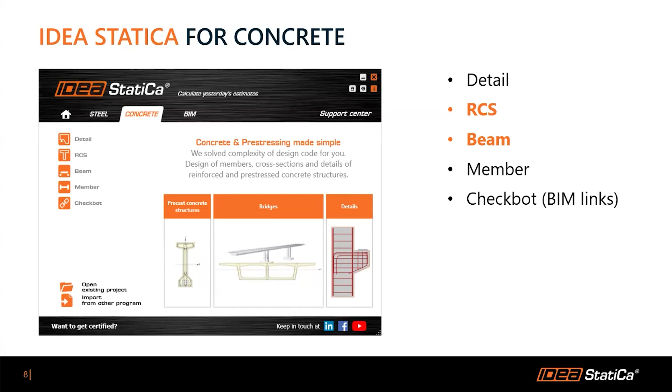So, as I've just said, we are going to work with beam application. But the question, of course, is what is it for? It is for straight or polygonal beams mainly. It was developed for 2D FEA structural analysis, but what is important, you can model single or multi-span beams, including time-dependent analysis. It means you can define construction stages like prestressing stage, transport, storage, start of working life, end of working life.

You've had these courses, so you know there are some issues with creep, for example. It is different at the start of the working life, it's different at the end of the working life. There are some issues with shrinkage, etc. So this application is for it.

Once we have this time-dependent analysis, it means it would be handy to have prestressing in it, and it is there. You can model pretension wires or strands, and also post-tension tendons. I know that you have done only pretension beams, am I right? Yes. And there can be also the combination.

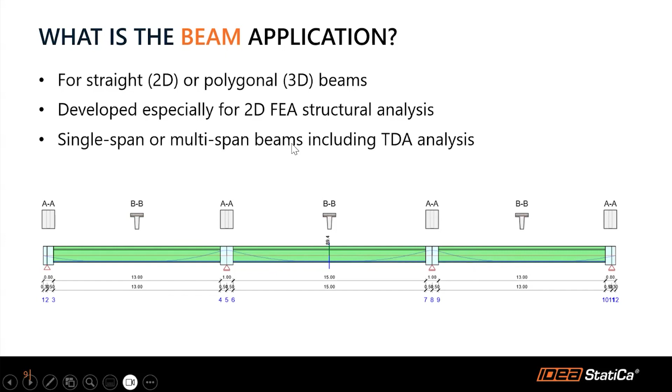So these are the capabilities, some assumptions, just to better understand what this software is about. We are dealing with 1D finite element model. I know it can be hard for you to understand it - you can imagine that we define only the straight lines with nodes, nothing 2D, no plates, no decks and stuff like that. The analysis is linear, meaning it's basically easier to calculate, but we have nonlinear deflections.

It means that it is influenced by cracks, by shrinkage and by creep, because these long-term deflections are usually higher than the short-term deflections. And what we can also calculate in this application is redistribution and reduction of internal forces on hyperstatic beams - if you have more than 2 supports, like more than a simple beam, you can calculate these kinds of redistributions according to the Eurocode.

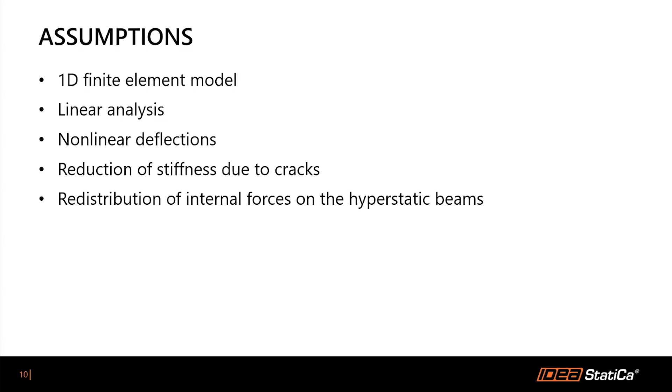The RCS application, the second one we are going to touch today, is incorporated in Beam, so you can send the data from Beam to RCS and vice versa. It is mainly for 1D section check of reinforced, composite, and pre-stressed cross sections. We have also a module for 2D checks, for decks, about the Baumann method. Maybe you will hear about it - you can just remember that there is something that can help with this Baumann method.

What is important to know is that both of these applications are strongly code-based, so you can calculate only according to Eurocode. In Romania, Eurocode is valid and necessary, so it will work for you. We can deal with ultimate limit state and serviceability limit state, meaning I'll show you how to calculate crack width, stress limitation checks, and things like that.

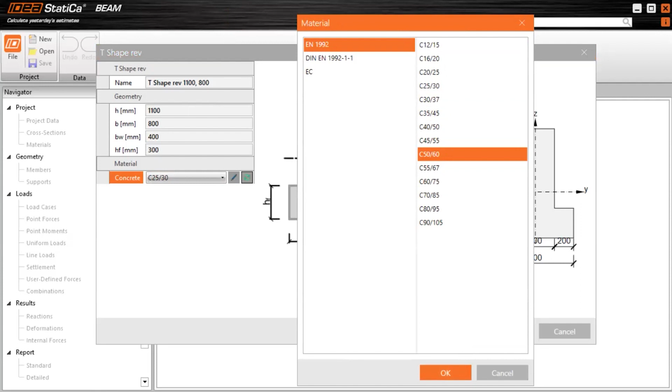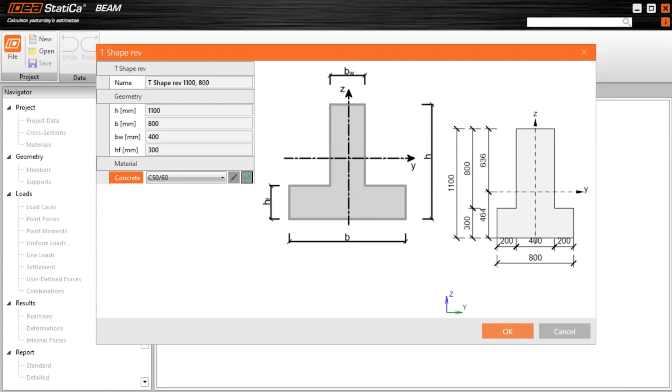So, we have the cross section, click on OK.

The last thing, we need to set permanent load and variable load. Let's input pretty high values to see some great results - permanent will be -85 and variable will be -45. Then I'm going to uncheck critical load patterns, let's leave it and we will have the summary combinations, yes. So it should look like that, and once you have it, you can click on next.

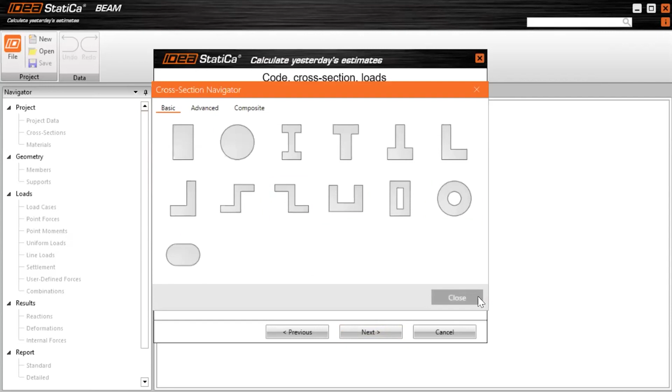Can you show the cross section, please? Of course - oh sorry, no, in that way, I have it here. Give me a second. So, here is the cross section again.

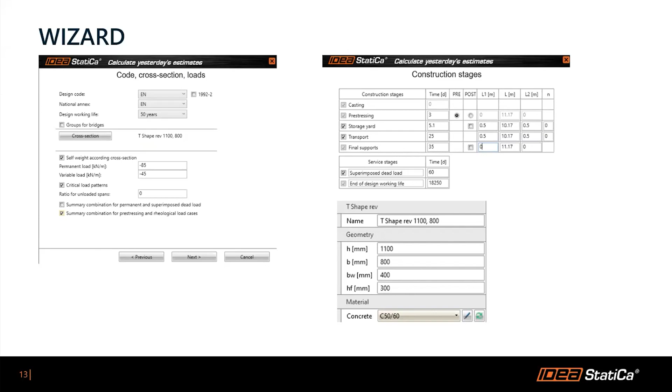So during this presentation, there will be some modeling parts like that. Then we will stop for a while and I will be talking about the inputs, what it means, etc. So don't be afraid, it will not be for the whole presentation like that.

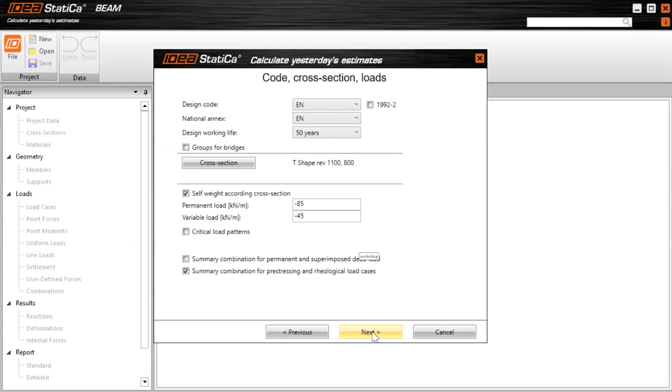Click on next, and we just need to set some construction stages. Please rewrite this cell to 0.5 and this cell to 0. It will define the supports during the construction process. You will see it graphically immediately in the software, and I will show you what these numbers mean.

It doesn't actually matter what you have here in times or other things, but it would be nice to have these numbers the same as I have, because we are going to change these times and work with them a little bit later on.

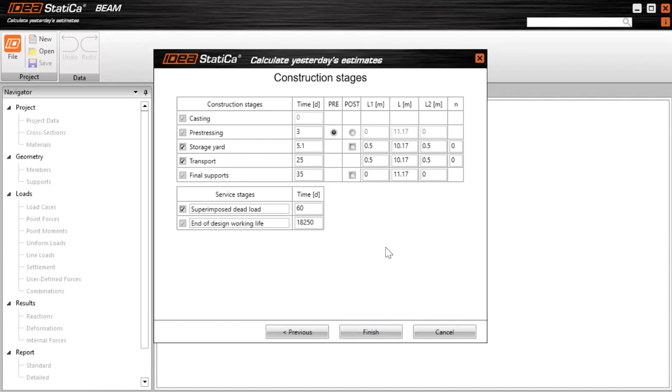So this is the model, this is the model in 3D, and now I will introduce the interface of the application just to know the nomenclature. So this is the top ribbon, here. This is the navigator - so when I said in the navigator, it means this left part. This is the main screen, the scene where the graphical input or output is.

Below that, there is a data window for inputs and additional information. So in case you make a mistake at the beginning in the wizard, you can go to the project data and change it. Project data is the first item in the navigator. We can go through it, what we have here, and you can see that everything can be changed after the wizard. The wizard is there mainly for the quick creation of the model.

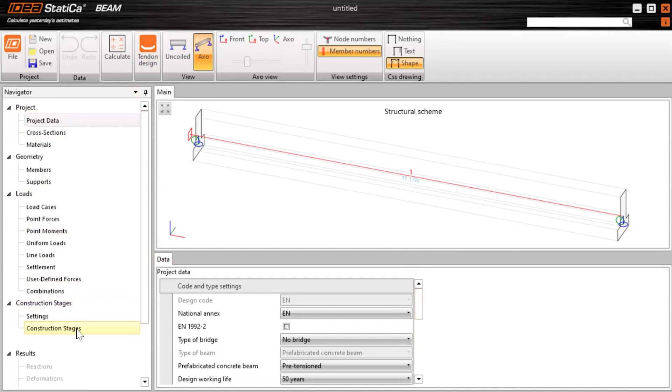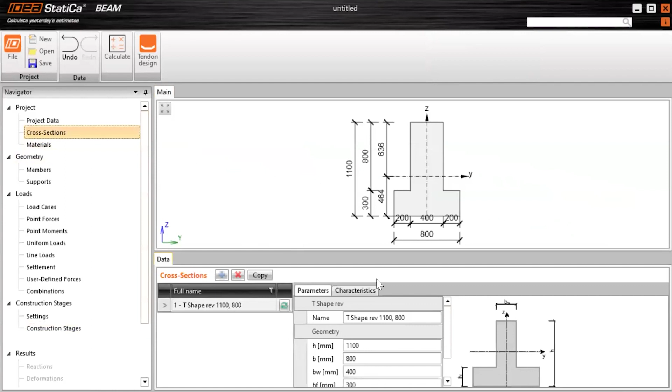So before we start with tendon design, I'm going to mention something about construction stages. The first thing you have in your design guide was how to calculate cross-section characteristics. If you go to material - this is the third item in the navigator, sorry, cross-sections - you can go here to characteristics and you have the results here. So you can check if your hand calculations were correct or not.

So here are the cross-sectional characteristics of this inverted T-section, in cross-sections in navigator and in characteristics in the data window.

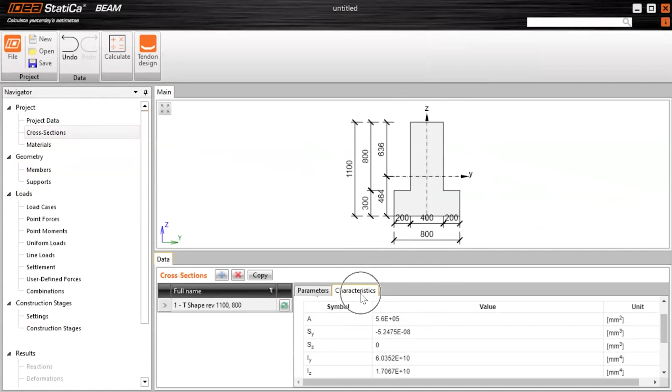The second thing you have in your design guide is the calculation of the concrete strength at the time of transferring of prestressing. You have the thermal treatment curves, you need to calculate the beta factor, and from that you need to calculate the equivalent time according to equation B10. I will show it very soon. From that, you need to calculate the strength of the concrete at the time of prestressing.

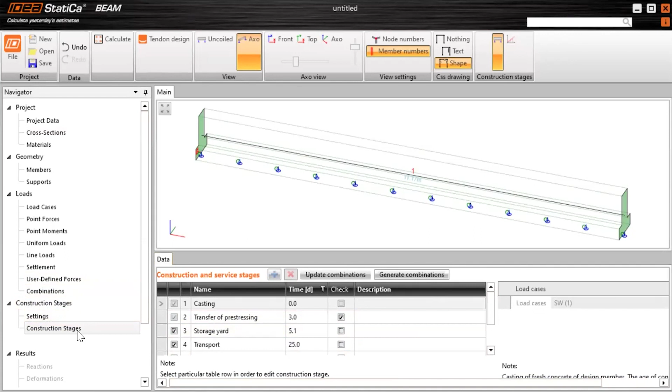So how to do that in the application? If you go to construction stages in the navigator - I will modify my screen a little bit - and select the transfer of prestressing stage, which is the second one. I will try to do something with the resolution, just give me a second, it's very bad.

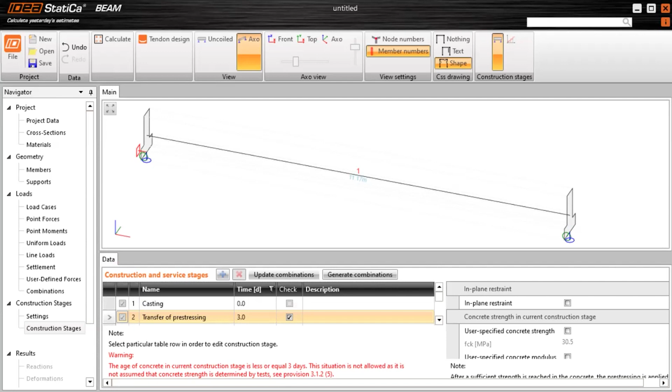Maybe we can try it like that. Ah, it's better, much better. Good. So, in construction stages here in Navigator, you can select the transfer of prestressing stage.

And we have three values here: we have the time, and we can, for example, check this user specified concrete strength. Let's rewrite it to 35 megapascals.

And this is it. Based on the thermal treatment curves, you need to calculate the beta factor and the strength of the concrete at the time of prestressing, so you will have the equivalent time from that. This time is calculated based on this number.

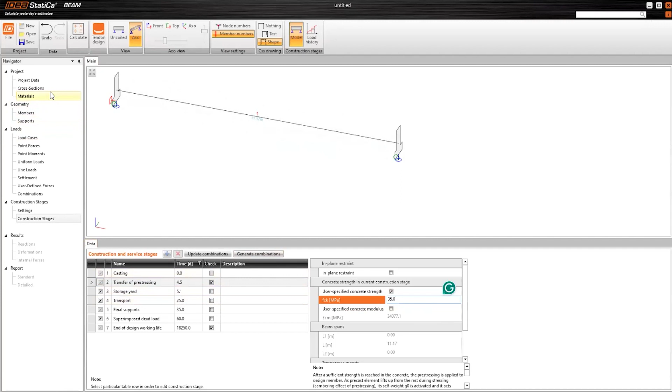Or you can simply input the value of the strength of the concrete manually.

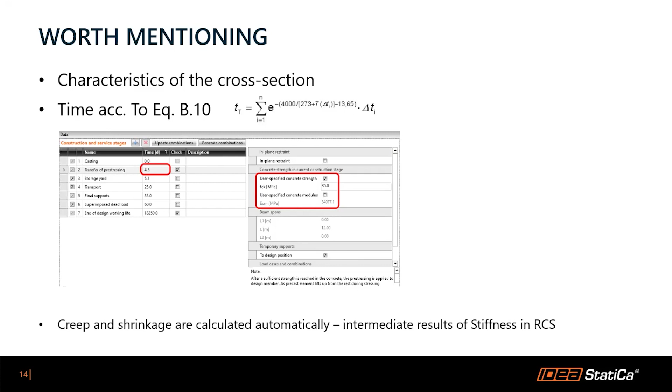Based on these values, the creep and shrinkage is calculated, and it's done automatically by the software. Later on I will show you where you find all of these results, where you find the creep coefficients and material types, and all of the inputs for shrinkage, etc. So that's the first important thing. If you want to set the time or the strength of the concrete, go here to the construction stages.

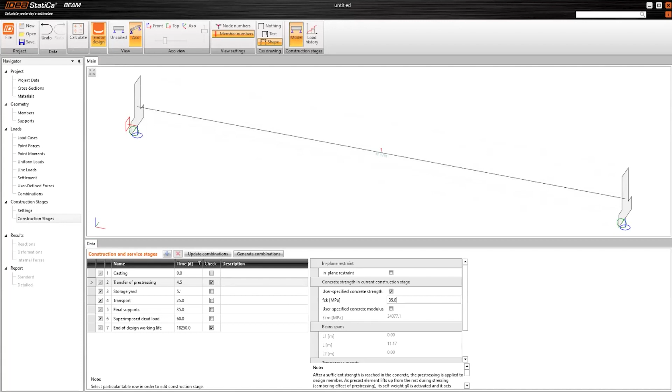Now let's move on to the tendon design, tendon input. You can access it from the top ribbon, and the tendon designer will be opened. Click on it. So this is the tendon designer.

First, what you can see is the graph or the chart of our construction stages. The first stage is the self weight, the second stage is pre-tensioning, and some additional weights and rheology, etc. This is the end of life, and here are the times we have input.

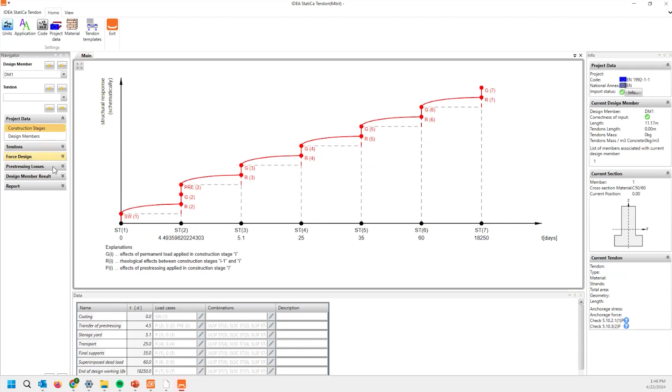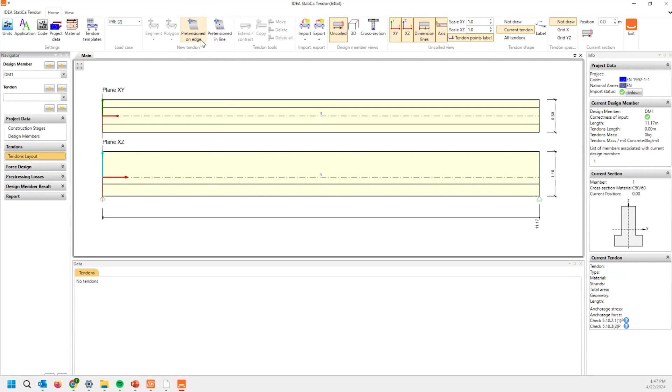Let's set some tendons. Go to tendons, to tendon layout in the navigator. You can see it's completely empty, and we will input some of them. The first one can be pre-tension on edge, like this one in the top ribbon. So select pre-tension on edge in the top ribbon. The tendon will be added automatically with some default values, and we are going to change it.

Before we start with the geometry, let's rewrite the initial stress. This initial stress is the stress you have on the stressing jack. For our example, it would be 1,400 megapascals.

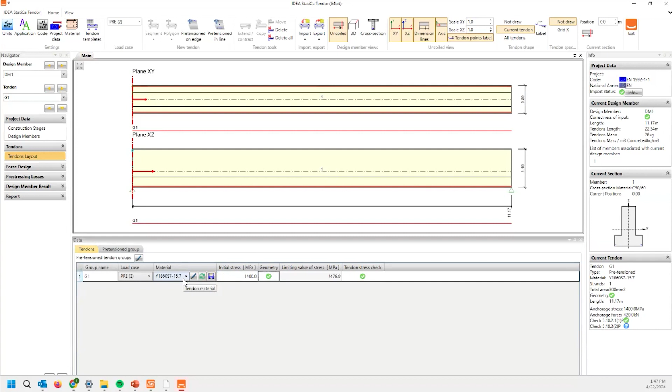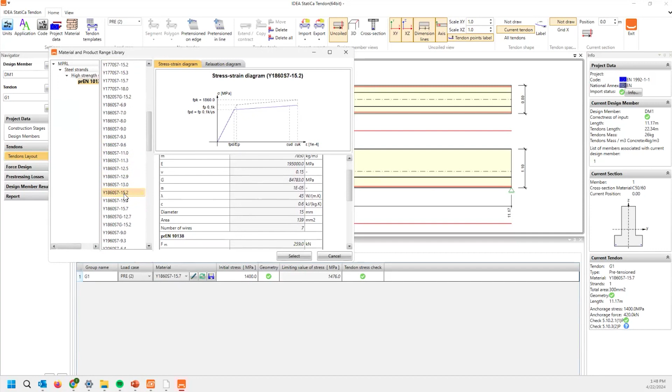I'm going to show you where you can select the material for the strands. The default one is that one. Again, we can click on the green arrows and select material from the database. Your professors told me you can use this one for your project - sorry, this one - 1860 S7, 15.2. In your project, I will show you what I have from your professors. It looks a little bit different, I know.

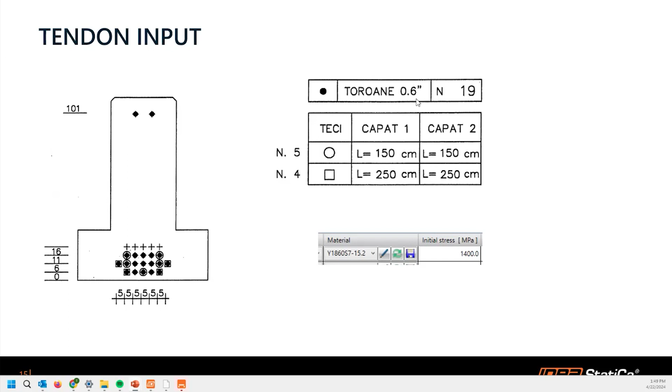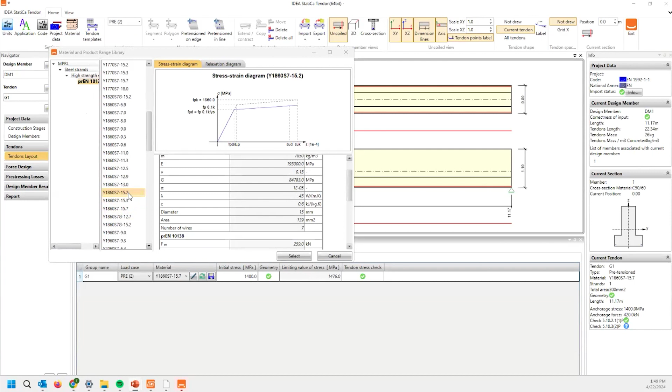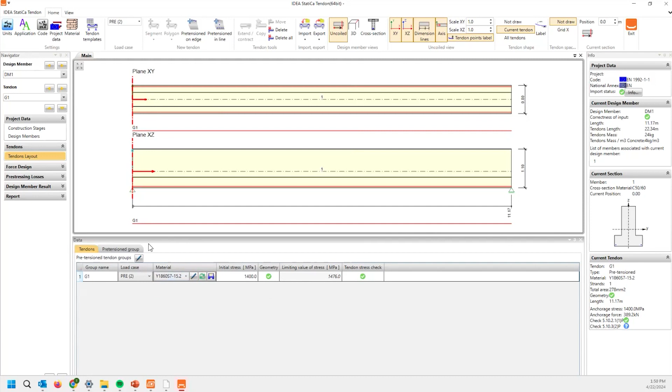We will input all of the tendons and change it again at the end. So we have the first tendon with this material and this initial stress. Let's go to the second tab in the data window, to pretensioned group, and we will define the geometry.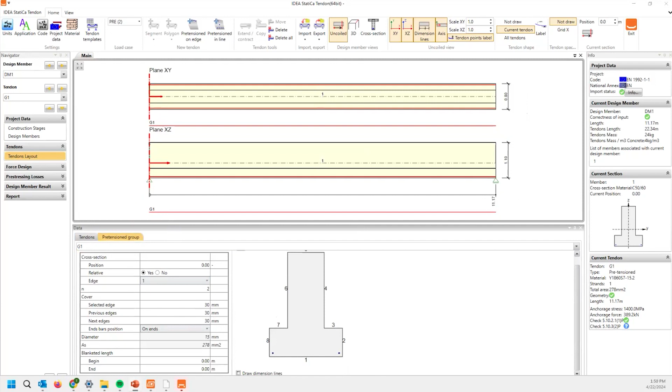I will define - we will have two of them. The cover will be 60 millimeters - 60, not 6, sorry. We will have 350 - oh, it's too much, sorry - 200. And 150 for the second.

You can play with the geometry - it's not complicated, I think you can see how it is changing as I rewrite the values. You can select the number, the edge, the position, etc. Don't waste time with proper inputting, we will import it at the end. I'm just showing you where and how you can define these tendons, these cables. If you want to do it for your project, you need to do it according to your design, of course.

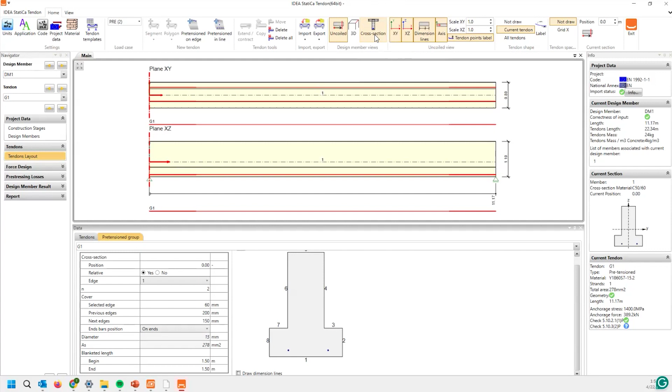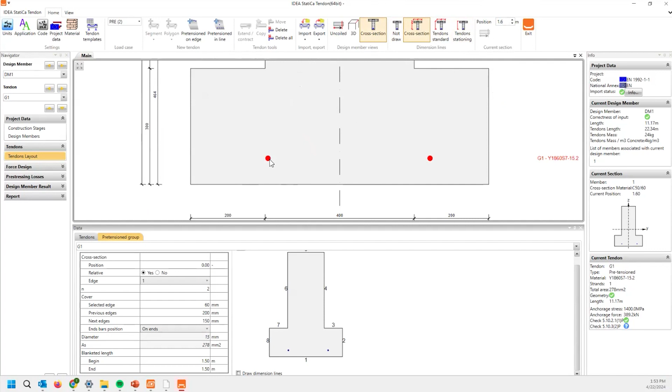You can also switch the view to the cross section here in the top ribbon and define the position of the cross section. I will zoom it a little bit. You can see that at position 0, it is separated from the concrete, and at position 1.6 meters, it is not separated.

But now we will import the rest of the tendons because I don't want to spend much time inputting number by number. So let's click on import in the top ribbon.

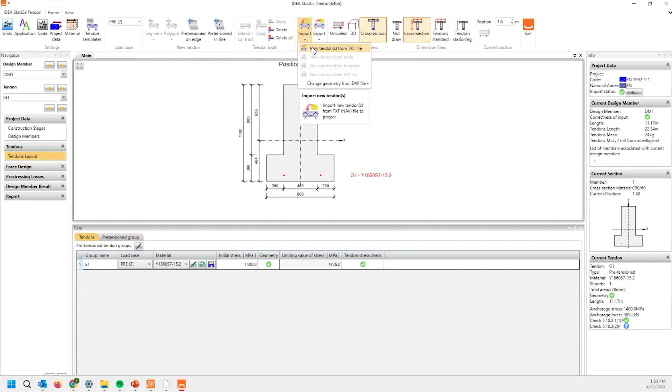So go to import and click. Sorry, before we import it, just delete all what you have just created, because import works by adding new cables or new tendons, the old ones will stay. So first we need to delete all. In the top ribbon again, delete all, and click on import, import new tendon from txt file, and find the txt file you downloaded at the beginning of the session, called tendons, and import it.

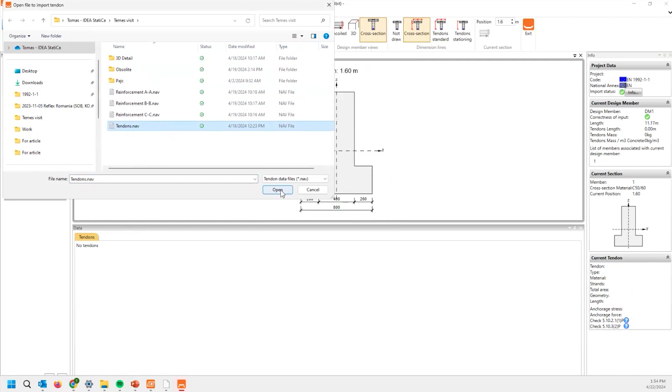Click on open, and you will see that the tendons, including blanketed length and separation, will be imported. We can check them here.

So, yeah, do that. And please rewrite again these initial stresses and switch the material. The material should be this one, and initial stress should be this one.

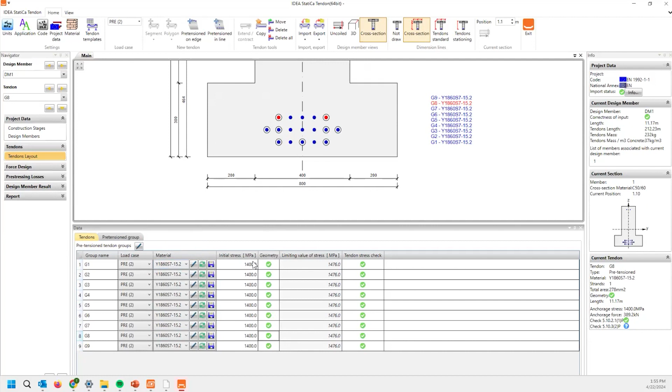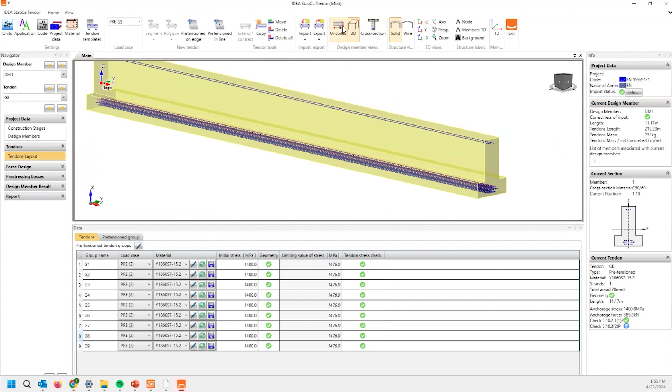If you want to switch the view to the previous one, you can go to uncoiled, or check it in 3D view as well. The views are here in the top ribbon. I will go for uncoiled, or maybe for the cross section, and we can check the separation or the blanketed length.

At 3 meters, there is no separation. At 2.1, a few tendons are separated. And at 1.1, for example, more tendons are separated.

So from where to import the tendon? The tendons, the button is here in the top ribbon, import. And you have downloaded the text file, called tendons. So select the file tendons after you click on this.

And what about online participants? Do you have any questions? Is everything clear from the point of view of modeling?

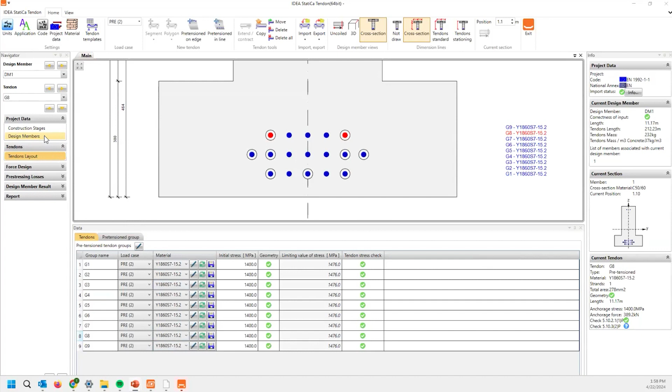So let's go to design member in project data. In design member, there is a way to modify the stressing bed and what is around the stressing bed. We are going to define slip, thermal losses, and for example the time for relaxation, which was realized before the concreting, etc.

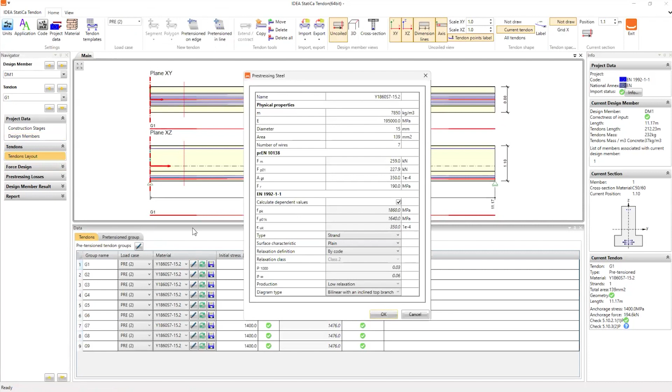Maybe I forgot to mention that you can modify your material for tendons by clicking on this blue pencil, and if you need, you can select all of these things like relaxation class. I think you have different classes in your projects, it differs for everyone. Some of us have class 1, some have class 2, etc. It is the definition of the area again, we went through it.

And if you are not satisfied, or if you want to modify your relaxation based on some inputs from the company, from the technology for concrete, etc., you can create your own exposure. You can create your own relaxation tables, relaxation curves and functions here by clicking on this user table.

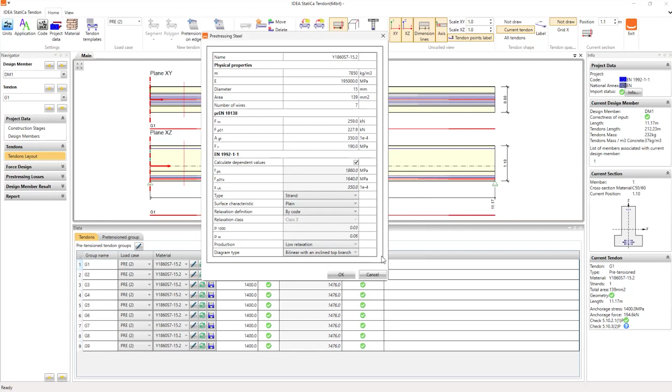It can be also handy for your project. But let's leave it according to your code, and let's move on to design member and click here on the pencil button for this stressing bed. There are some settings. We will stay here for a while, and I will explain what you can set here and what it influences.

So I will rewrite the numbers to have numbers I need, and I will gradually explain what they are for, and sudden release. So I have a slide for that. It would be better. This is this slide. So what we have in the settings, the first item is the length of the prestressing unit.

You know, from your design guide, you know this formula, and this is this value of LP. This is for calculation of loss due to slip. These values for the slip can be set here as anchorage set slip. These are both together.

And also for that kind of loss, according to equation 10.3 from Eurocode, you can select the temperatures here in this setting. This code coefficient is basically this number, is 0.5.

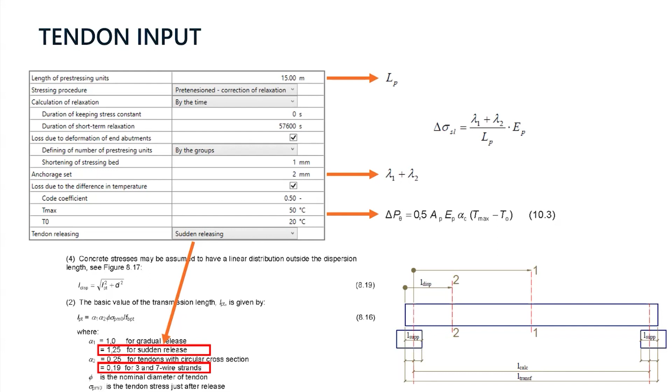So let's set it. Sudden release 15 meters, and there is also a correction of relaxation. I set 0 seconds because some companies can hold the maximum stress on the stressing jack for some time, and it can reduce the relaxation in the tendons.

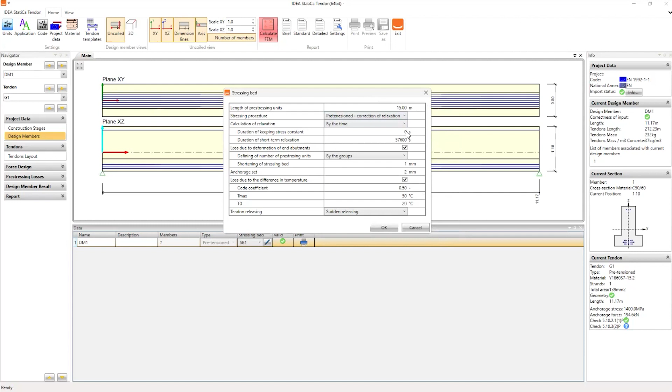This is the technique how to do that, but I noticed that you don't have it in your design guide, so let's leave it for now. We can discuss it during the discussion at the end. I can draw you how it works, how the time can be calculated, etc. So let's stay with this setting and click on OK.

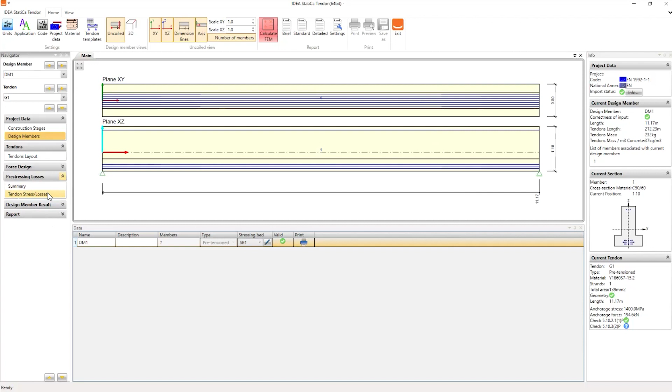Now we will move to prestressing losses and to the part of tendon stress / losses. So you noticed that the inputs were very easy. You just need to know where to input what number from your design guide. Nothing special, few numbers. And the geometry, of course, that was a little bit complicated.

Now you need to know the losses. You know that there are a lot of equations in your design guide, a lot of methodology behind. But in the software, in practice, you need to do it quickly for all of the use cases. You don't have usually time to find the proper equation in the Eurocode, etc.

So that's why we added this part of the software, and that can tell you all of the losses, or show you all of the losses calculated by one click. You don't need to care about the equations. You just need to know that, hey, I need this kind of loss, anchorage set loss. I need this kind of loss, which is loss due to deformation of abutments, etc.

And at the end, yeah, I need to calculate the model first. Sorry, it's on the top ribbon. Please click on it and let the program calculate it. And after that, you will see the stress at the beginning of life, stress at the end of life, etc.

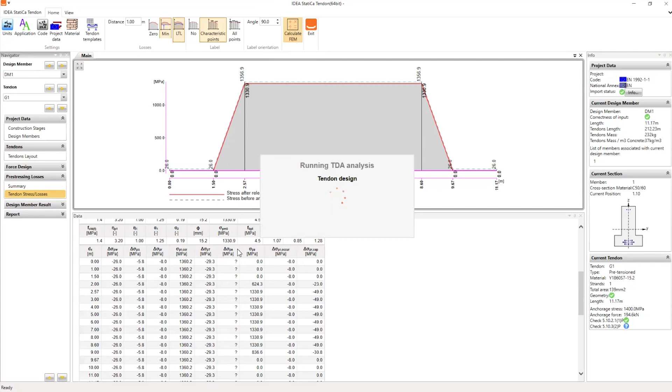It needs to be added to the time for relaxation that is happening before the concreting. So the final time for relaxation must be set here.

And now we need to go back to the construction stages and realize what we have. We have one time for concrete that defines the strength of the concrete at the time of prestressing. And then we have the second time, this time, that defines the relaxation that happened before the concreting. And these times can be different because of thermal treating. These are not the real times. This is always the real time, for example, real time plus this equivalent time from this equation.

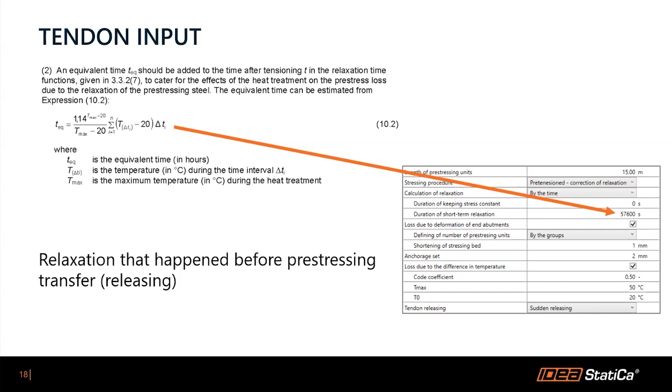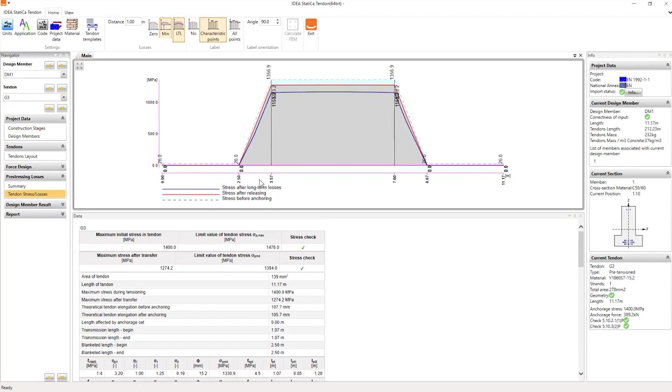And yes, you can find all of the numbers, all of the losses, all of the stresses in these tables. If you don't know what a number means or what this loss is, there is always a tooltip that will tell you what it is about and where you can find it. Usually there is also a link to the code, etc.

For those who were with Lukáš in the morning, this is the stress. The sigma PM0 is the stress you need to input to detail as a stress. So you can pre-calculate this stress, for example, here in the beam. This is the transition length, from your design guide, LPT. Everything is calculated automatically, of course, because this is the software.

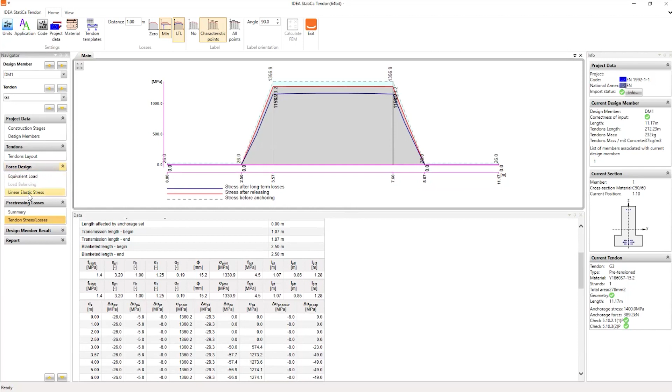So we have strands, and now I will show you the linear elastic stresses in force design. You can go there, please, and click on calculate.

And now you can see the maximum and the minimum stress through the whole beam. The maximum linear stress, which is very important, is without cracks and without the exclusion of concrete in tension, is 5.4, and the minimum is -20, if we did it correctly.

But the question is based on what? We input only permanent and variable loads. What about combinations? What about other calculations? Where is it? I will show you, because according to code, all of the combinations necessary for the design are created automatically. You can, of course, control them if you need, for example, to add another variable load. So let's exit the tendon designer by clicking on this button.

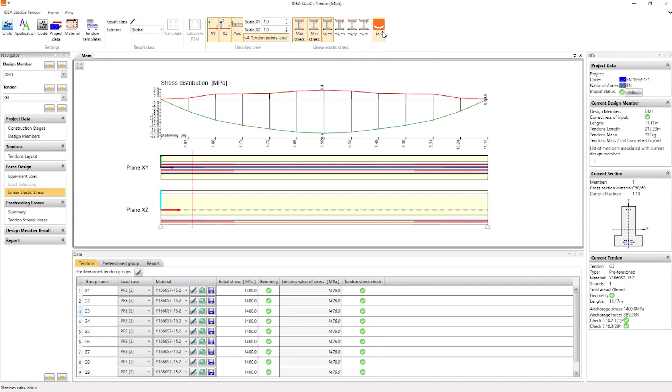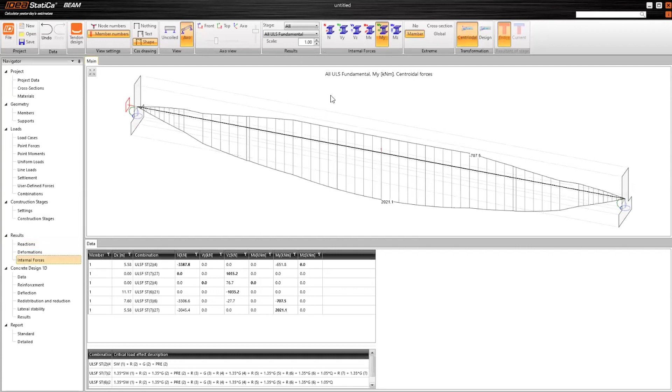You can see that there are some new items in the navigator, like results and internal forces. So I will go for uncoiled view in the top ribbon. You can select transfer of prestressing construction stage and all characteristic combinations, and you will see bending moment, etc. Here you can go through all of the stages, all of the combinations, all of the load cases, and display deformations, internal forces, and reactions.

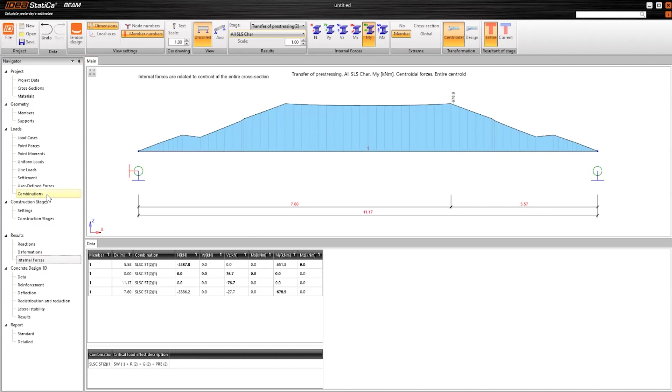So it will be time for coffee break, but before that, let's take a look at the combinations in the navigator. It's the last item for loads. As you can see, all necessary combinations for Eurocode are predefined, because we know that the permanent load we input at the beginning will be added at the start of working life, and the variable load will be added at the start and at the end of working life.

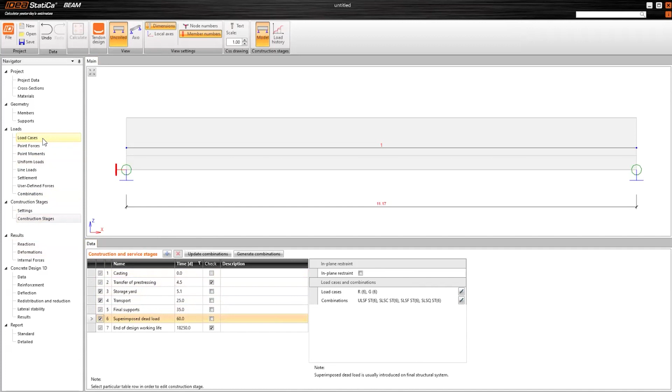I will show you if I go to construction stages, to the superimposed load... oh, it's not there, sorry, to load cases. Am I right? Yes. If I go to load cases, to G6, you can see that the uniform load is already input. And this G6 means it's the 6th construction stage. G7 is the last one, the end of working life, and G6 is the start of working life.

So we have this value here as a uniform permanent load, and there is the Q load case, which represents variable load. It was created automatically, and it has the value -45. And here is the place we will speak about later on after the break, a little bit more about how to control it.

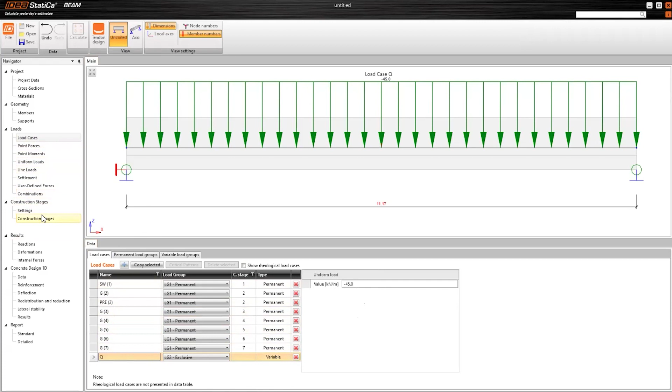And this is the place where you have your loads, and based on these inputs, combinations for characteristic, frequent, quasi-permanent, and fundamental ultimate limit state combinations were created. You can edit them, update if needed, and you can create your own combination if it is needed for your design. So let's do the coffee break.